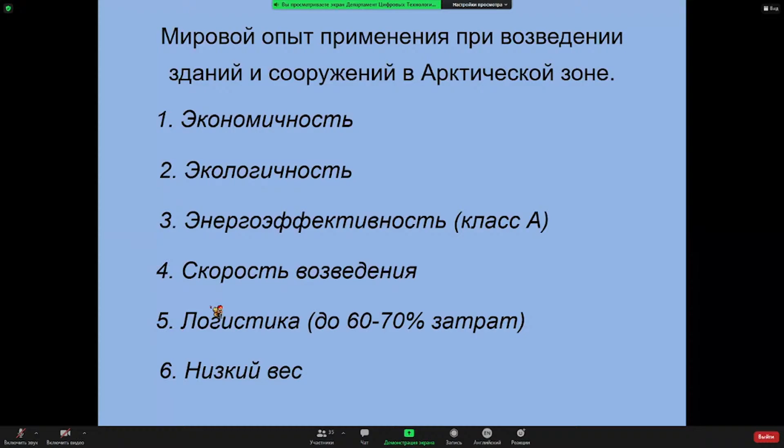Let's have an example: if we're going to build childcare somewhere in the farther regions, the building will need repair for the next 50 years. There will be a lot of losses through the heating system, and energy efficiency will be at a lower level. The main thing is not the construction itself. The construction is only 1% to 7% of the life cycle of the building, and the use of this building is more than 90% of its life cycle.

So if you're going to show the better use of this building, it will not be needed up there in the north without the better experience of using and constructing these buildings.

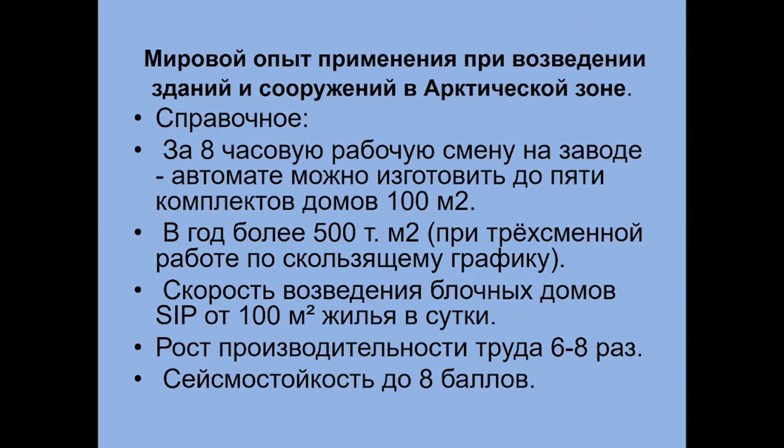So in conclusion, I will say something else. I want to give you some information on the technologies. You can look it up on the screen to see how efficiency can grow in the construction of buildings in the north.

And the technology of the construction of it.

Technology of the construction of the house kits, and of everything else, is the industrial construction and all other technologies that are presented in the Russian Federation to this day, presented by an Italian company.

If we're talking about the necessity, our president talked about it earlier. As I know, in Yakutia, we need a lot more investments for repairment of the houses, and it we can count as crazy money.

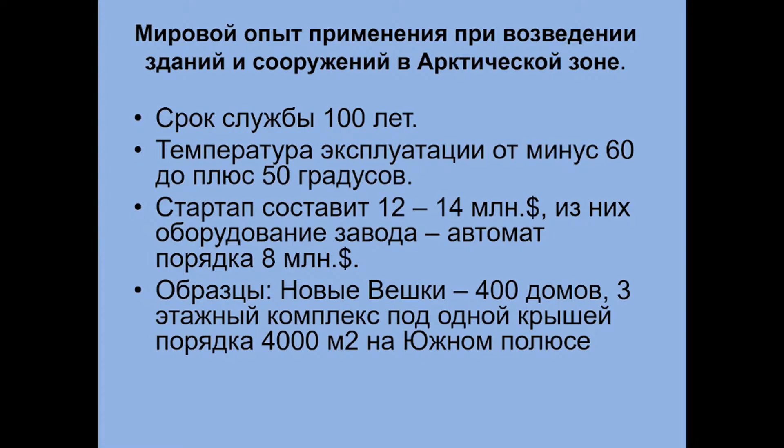The technology of panel construction buildings was invented by the French people, and these are technologies that were invented after World War II, and it was necessary back then. But then our engineers also took that technology and built buildings like that on the whole territory of the Soviet Union.

Yakutsk is quite a large city, one of the largest cities in the North, and it's built on permafrost. We know that Yakutsk has a more or less good situation with buildings, but still we have some problems that we have to somehow face if we live in a warming climate.

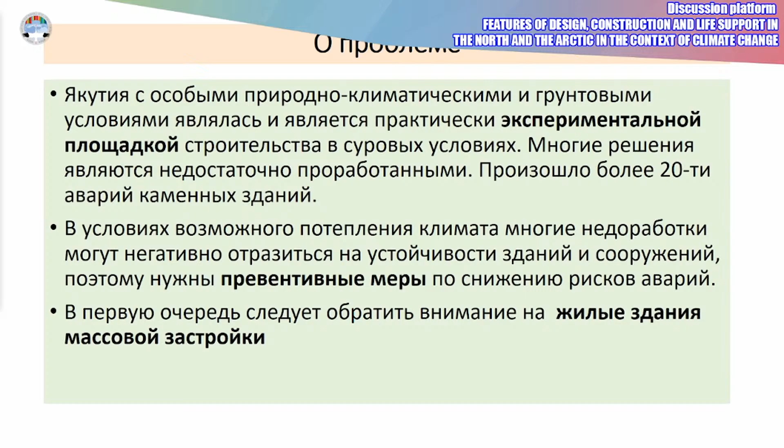So what's the main problem? Since capital construction started in Yakutsk, the city became a kind of testing site. The requirements for frost resistance of concrete foundations only appeared in the 1970s, only 25 years after the start of capital construction, when the terms of reference and regulations were developed. That's why we had some problems with building failures.

Let's look at what kinds of buildings we have in Yakutsk. We have so-called Khrushchev-era houses, large prefabricated panel houses, prefabricated block houses, and other types. Here are the years when these types of buildings were commissioned and how many.

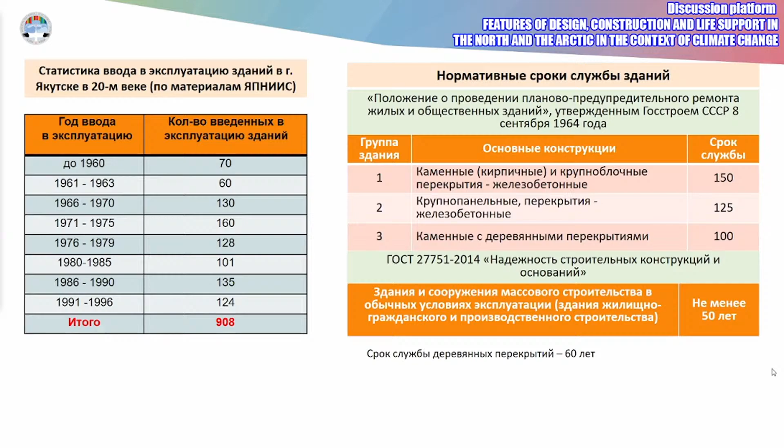In Soviet times, we had very strict requirements for the service life of these buildings. Buildings with wooden floors had to serve for 60 years. Those were among the first houses, and the term has already expired, so we'll have to do something about it.

What other problems do we have? The first houses with wooden floors are not very frost resistant and have very low-ventilated basements. And the brick structure is not very safe.

Another type of building—they wanted to make something good, but in fact it didn't work as they thought. Again, the basement is quite low, infrastructure is leaking, and wear and tear affects this building significantly.

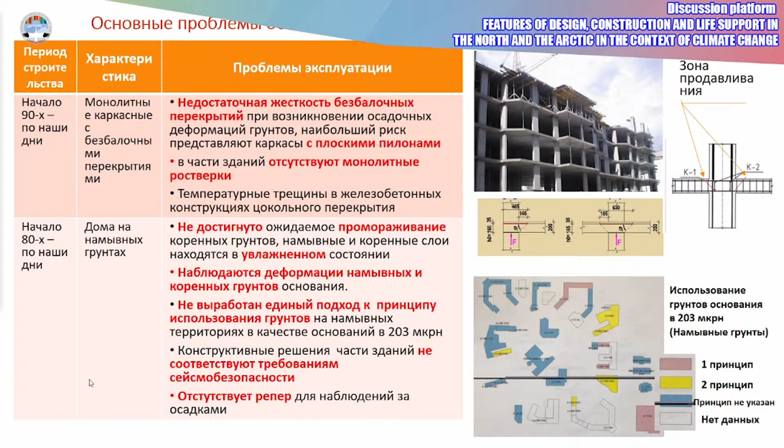Another problem with those artificial sandbanks is that buildings were built on plots where different types of ground were combined, which is not recommended. One of the key problems is the rigidity of buildings and their resistance to subsidence deformation. Here you can see those problem points that we have in different kinds of buildings.

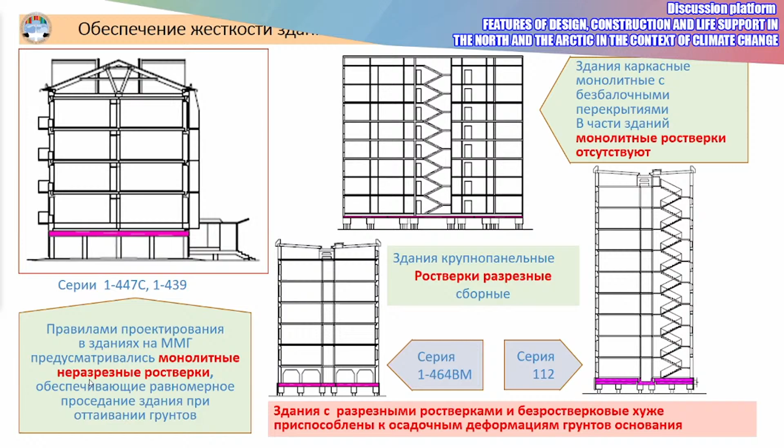The problems include the absence of monolithic grillages. So what do we have to do to ensure the safety of these buildings? Technical documentation, monitoring, calculation, analysis, and everything else that has to be done under conditions of climate change.

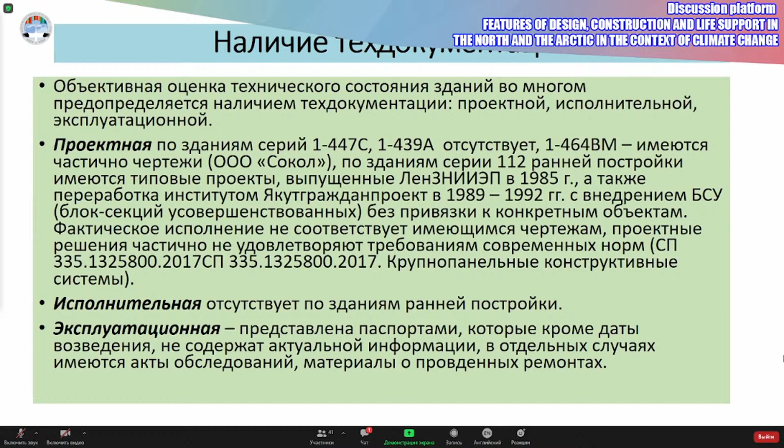For older houses, actually, we don't have any technical documentation. With newer buildings, it's more or less okay, although the factual designs do not always correspond to the typical or recommended terms of reference. That's why we cannot be sure at all times what was used exactly in one building or another.

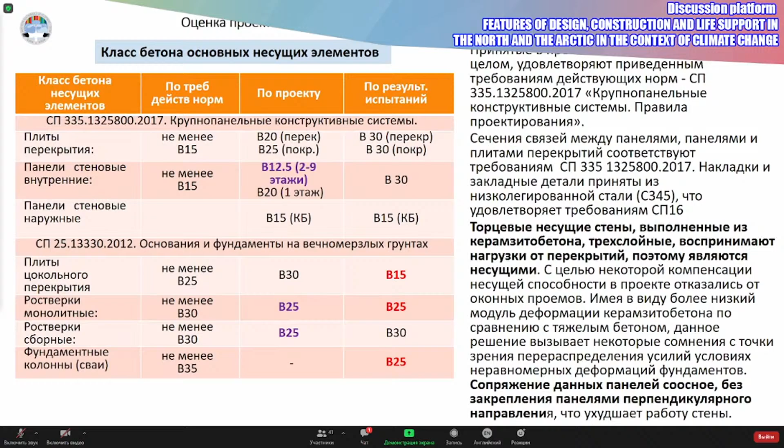Another key problem for northern climates is the class of concrete quality, especially for the bearing structures. Again, here we see that the class of concrete does not comply with the requirements, based on the results of real-life tests that we have done.

Another key aspect that we should look into is the reinforcement of the bearing elements. Again, at some points, the solutions that were used when building the houses did not comply with the requirements.

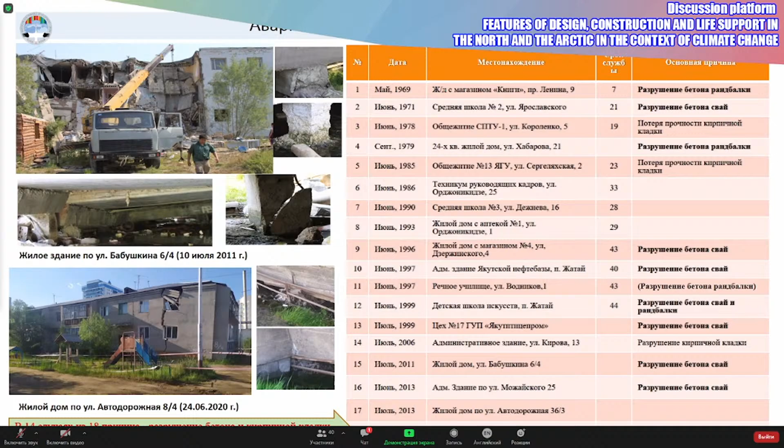We had over 100 different failures, some of them quite serious, and 18 houses suffered major failures. But we didn't record any problems with foundation instability due to permafrost melting—so either it didn't happen, or we didn't record it.

The main reasons for failures were cracking of the piles and foundations, decomposition and wear of concrete, low quality of concrete, and the destruction of brick structures.

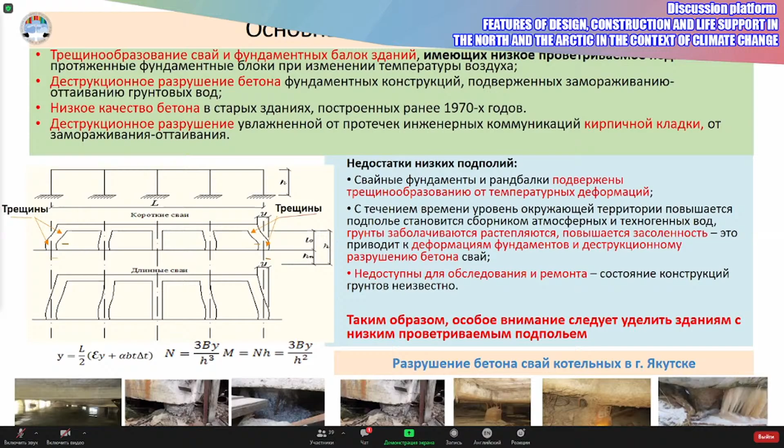Especially, I would like to note that these low ventilated basements, pile basements, cause a lot of problems, especially in the old houses. Recently, we had some more news about failures and cracks in the brick buildings of the older types.

We are using modeling, and we use quite robust software models. Here you can see the results for that building that subsided. Our results showed that the reason was that silty grounds, silty soils were under the building. And you can see how uneven the underlying ground was.

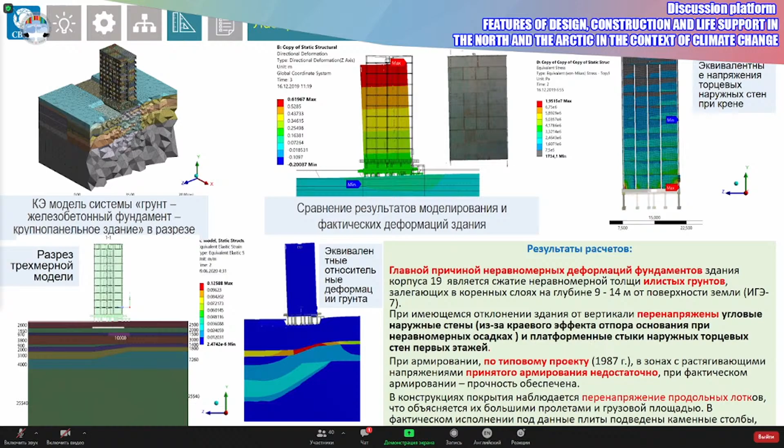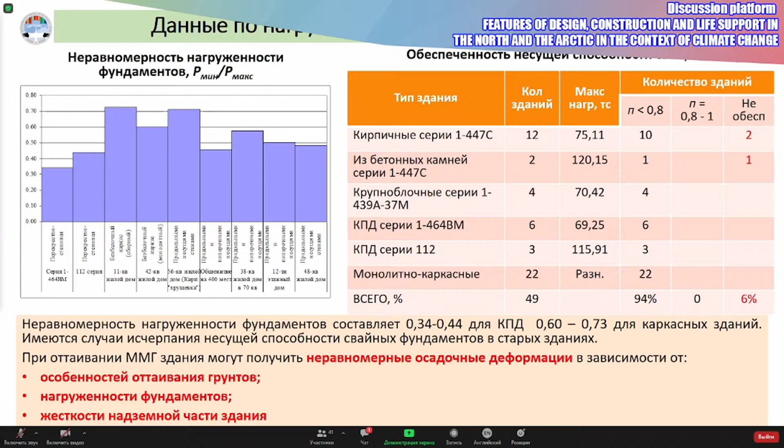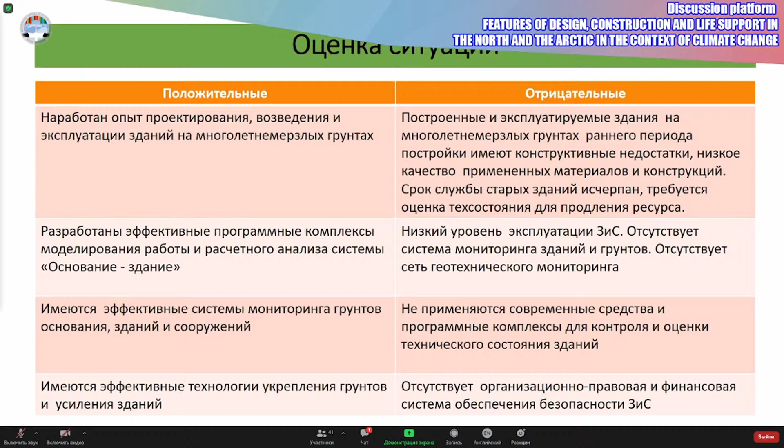We also have some information on uneven load of the pile foundations. Sometimes there are overloaded or underloaded sections.

What is our solution? We have to get ready for climate warming. We have to face the present situation, and it's the life of people. I think it is necessary to establish a computer modeling center, a unified center that would undertake calculations, requirements, monitoring.

We have people, we have software, and we did this calculation modeling work at other facilities because we don't have enough hardware. We have staff, we have human resources who are aware of what has to be done, they know how to do it, but we need state-of-the-art hardware to undertake all of this.

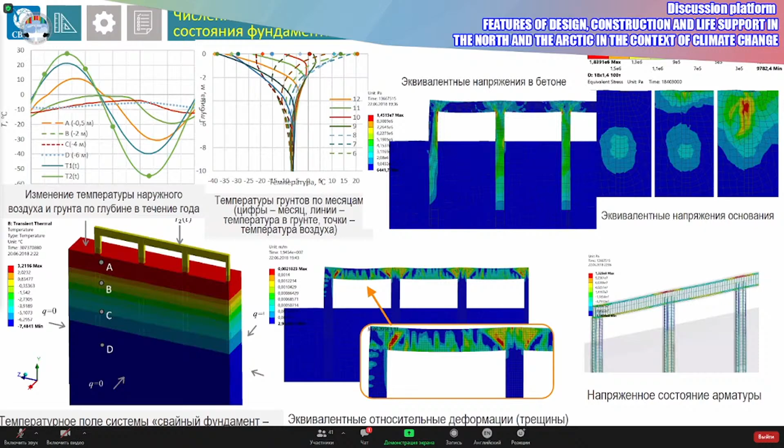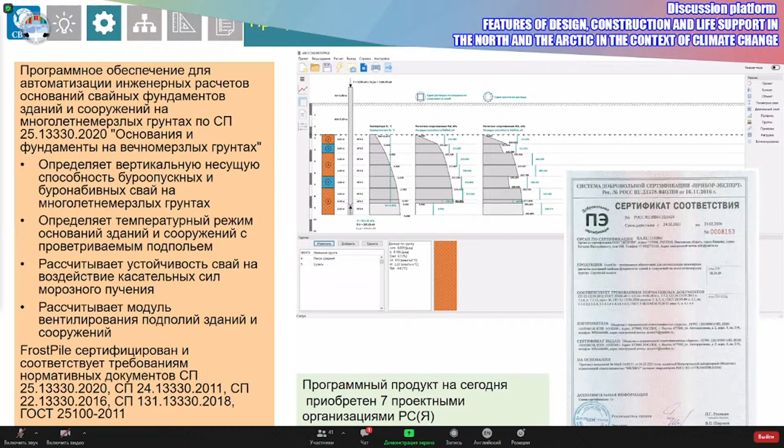Here you can see the numerical modeling of the thermal status of soils. We also developed software for calculating the pile foundation designs.

So what are the recommendations? To develop a Republic-wide program for ensuring safety of residential housing, to reduce the risks of failures due to permafrost degradation. We should establish outstanding geotechnical monitoring of buildings, especially on the artificial sandbanks.

Number 3, inspect all the buildings with low ventilated basements, especially old buildings, and we have to retrofit them to comply with modern safety requirements. And of course we have to replace them step by step.

We have to develop special rules for building on artificial banks. And as I mentioned, the Center for Computer Modeling would be a very good idea. Thank you. Do we have any questions for Fyodor?

Today, I want to remind you that I have a co-author, Chunyuk Dmitry. He is the head of the department at the National Research Moscow State Construction University. And I want to highlight...

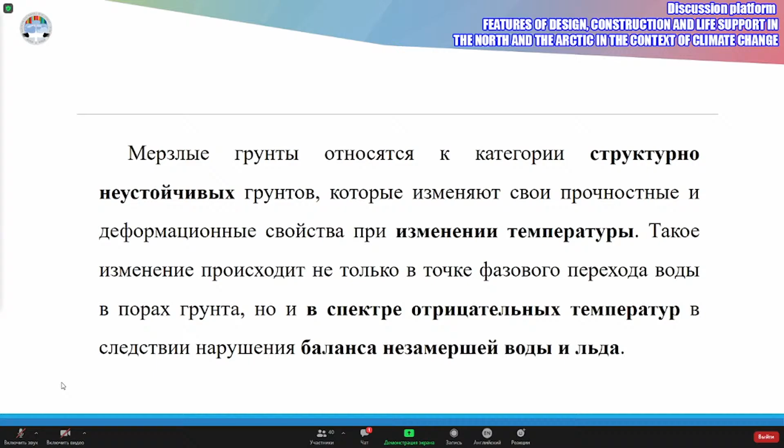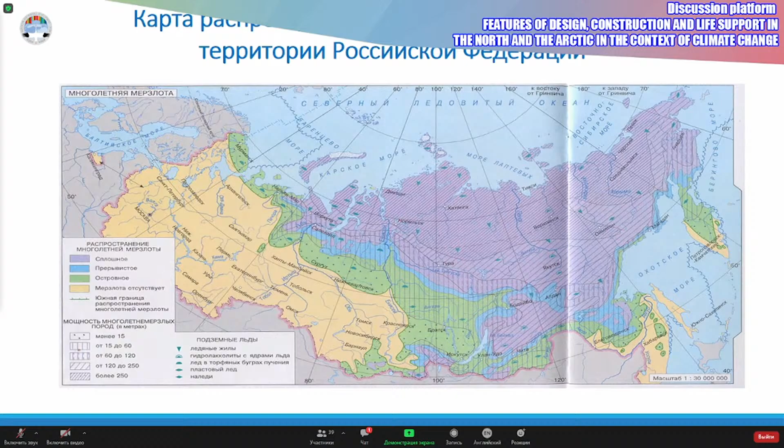So we needed to construct the buildings so we can be sure in it tomorrow. The most intensive warming season is spring.

Here we need new technologies. The most elementary thing - that's the story of permafrost research, thinking about it, and the experience of construction and capital construction.

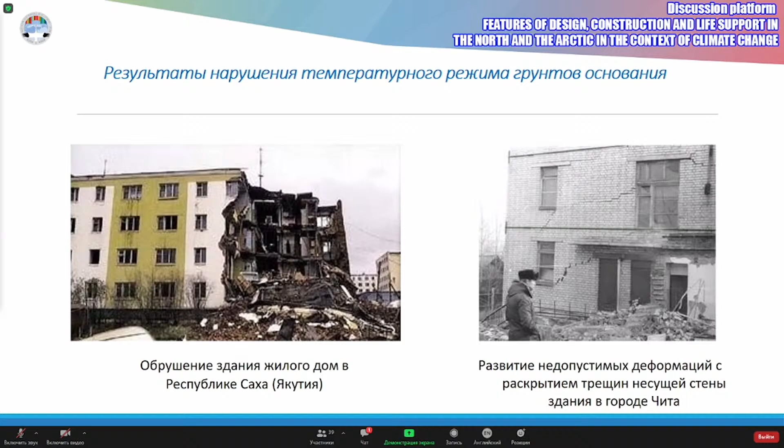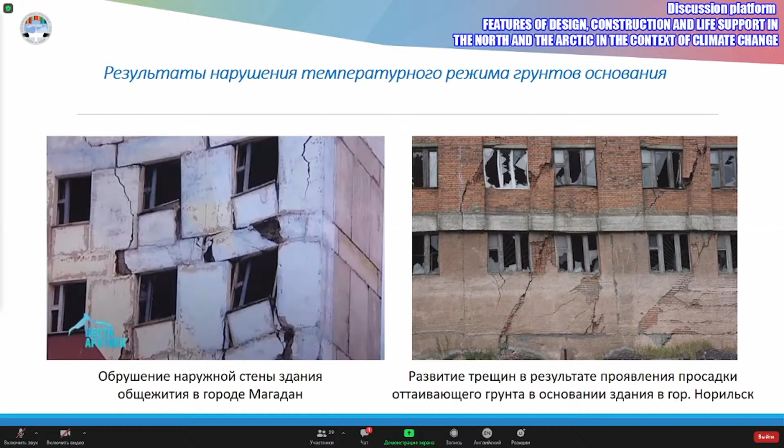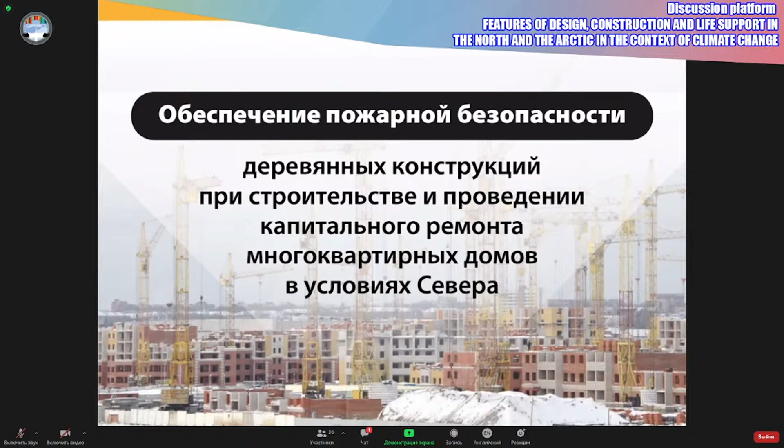That is why if we look into the special requirements for fire safety in the far north, first of all, there are state standards. This one is our bible for fireproofing timber, and there is an item in this standard which says about the lifetime of fireproofing: if it's intended for over 1 year, we have to make tests for the wear, and if there are no such tests done, it means your fire retardant is only good for 1 year, and every year you will have to reapply it.

But if your lifetime is like 7 to 10 years, whatever, the standard says that you have to prove this using fast tests, climatic tests. So a fire retardant, for example, should have 2 protocols from an accredited certified laboratory. First one is the speed test, climatic fast test, and the other one, the proof of fire safety properties after the fast test.

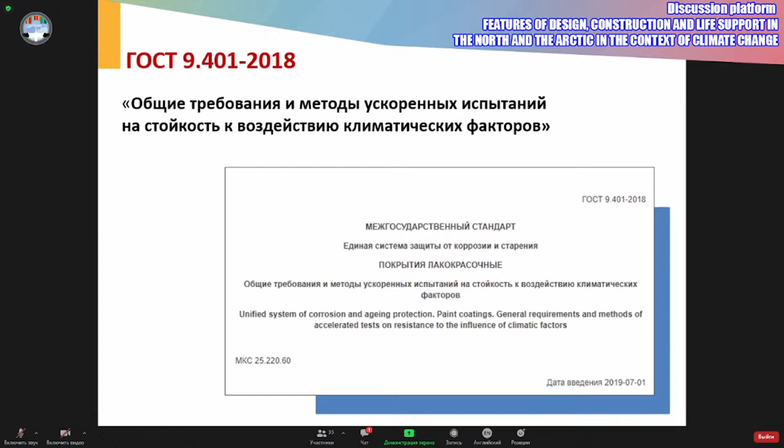So this was my first point, and the second one has to do more with capital repair, and it is very relevant for our country. When we repair a roof, it is recommended to do it at temperatures below 0. Why? Because at above-0 temperatures it may rain, and when we disassemble the roof, you will just flood your upper stories. The materials used should be ones that can be operated and installed or applied, including at below-zero temperatures.

And us, as one of the leaders of producing fireproofing substances, we have some solutions for cold climates as well. Our Pirilax series has components similar to the components of timber, and it crystallizes at -16. So above -15 you can just apply it without any preparation. You can use it in attics even without a roof, which is really helpful.

So what does it give you? It retards fire, it makes the timber fireproof, it's also an antiseptic substance, and it also prevents cracking, conserves the surface, and stops wear and tear. So if you apply this kind of substance, you prolong the service life of your timber structure.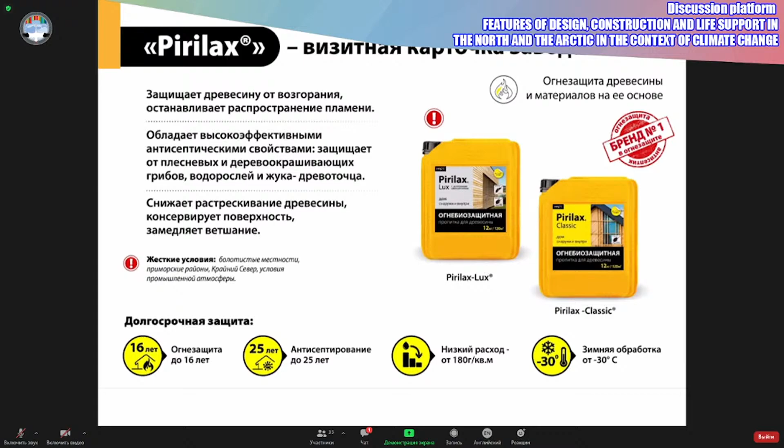As I mentioned, we have to provide certain certifications through specific climatic tests. For these substances, we have such certifications. For the far north, in the open air, we have a certificate for 5 years. And in condition number 3, unheated premises like attics, we have a certification of up to 5 years of service life in the far north. On the slide it says up to 16 years, but that's in more moderate climates. These are the first pages of those protocols, and when you fireproof your structures, you have to make sure you have these protocols, whichever substance you use.

So how do modern substances act? On the right, you can see a regular fire retardant. Since ancient times, retardants were mineral water solutions - water evaporates and minerals stay in the timber, which stops fire. But they have a certain drawback: salt. Salt is absorbing water, and salt will be efflorescing on the surface, and also it's water soluble.

So for those regions where we have challenging, harsh continental climates and short summers, where there are a lot of rains, we recommend substances consisting of timber-friendly components, where the components interact with celluloses and lignin, modify them, and transform the timber to fireproof it.

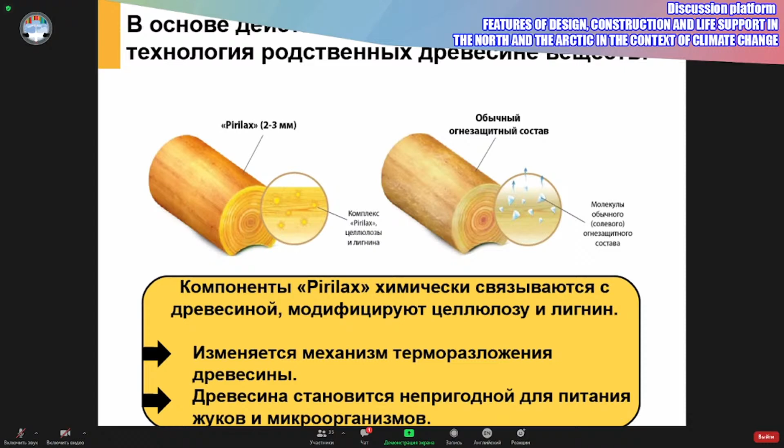On this slide, these are examples of regular standard mineral salt fire retardants used. You can see these white spots that start forming on the surface in the autumn. Again, you have troubles with painting when you have this surface formation.

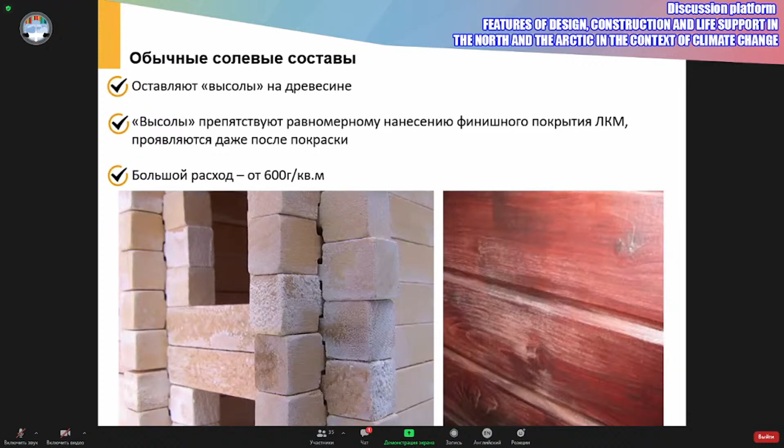This is how our fire retardants work - not only ours but any fire retardants. These are roof structures of a cafe. There was a fire from the electric network, and they have soft roofing, although it's a violation of rules. Despite the fire, after 60 minutes the fire was put out and they disassembled the roof, and you can see the structures have just charred a bit. After cleaning and recoating them with fire retardant, you can continue using them.

There are also more economic substances called hybrid fire retardants. They are a little bit less effective, but they're also used, especially in places where you don't need any special decoration - for example, attics. Hybrid means it has both mineral components that can also help, but their percentage is less, plus these special timber-friendly components.

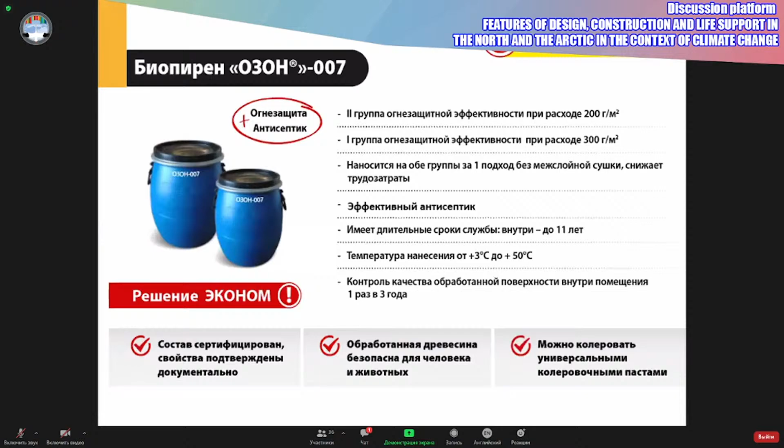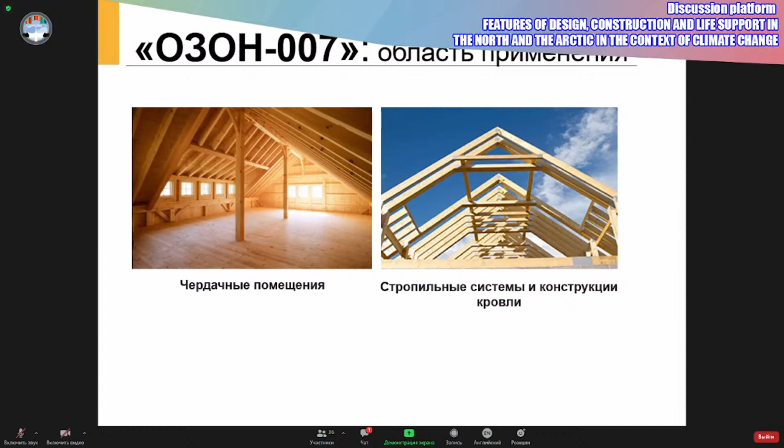In our series of products, we have Biopiren OZON-007, and this life service certificate for northern conditions should be there, and we have them. As I mentioned, hybrid solutions can be used inside the attic, and this is the comparison of our products without mineral components and with mineral components - hybrid components.

Both of these substances have certifications. Can you please go on to the summary? But it's just an example - I just want to explain that hybrid substances can't be used at below 0 temperatures.

Thank you for your attention. If you have any questions, I'll be happy to answer them.

Yes, it's a very important aspect. Annually, we lose a lot of wooden houses and we lose lives, which is a tragedy. Please, you could have indicated your website where we could find all the information. NPO Nort - you just Google it and you can find it. Okay, thank you.

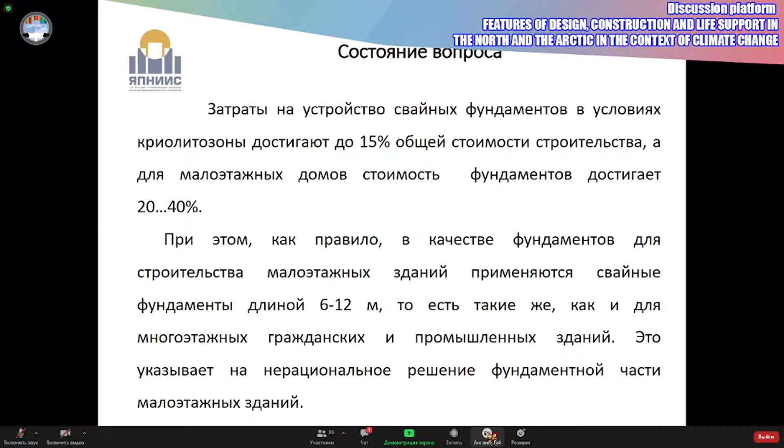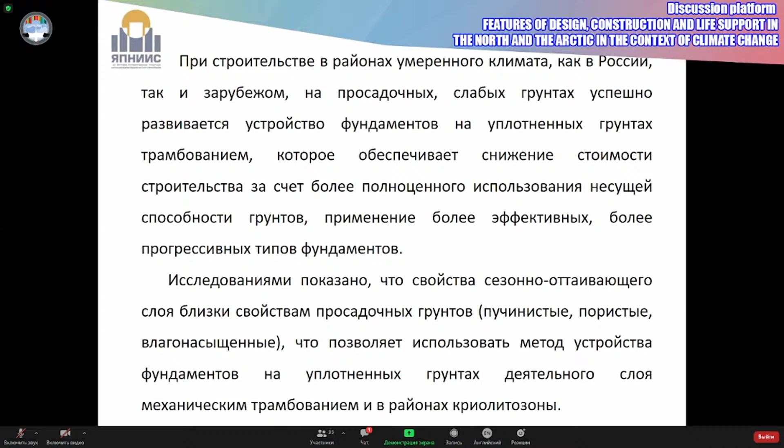So our institute, since 1998, paid attention to the possibility of using this slab foundation. We tested lower foundations in regular temperature, and last year we did some tests with the mechanical ramming.

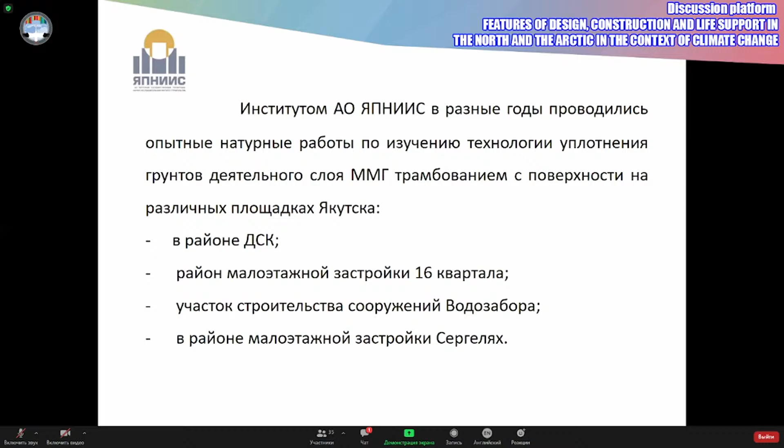And the foundation can be taken on a status, and the main parameters are the definition of the weight of ramming and the height and how deep it goes.

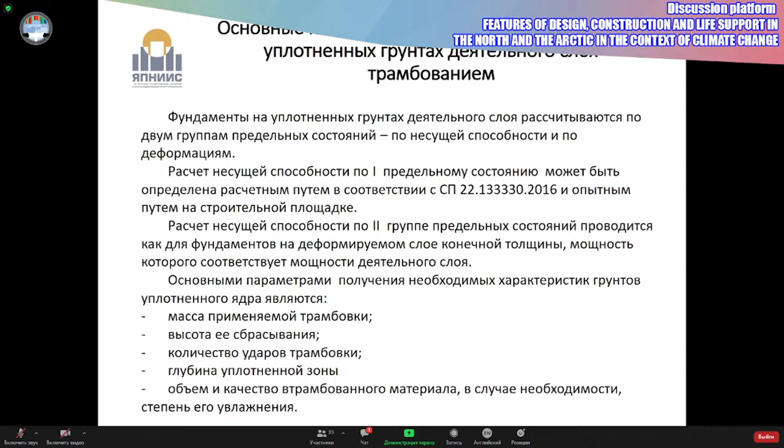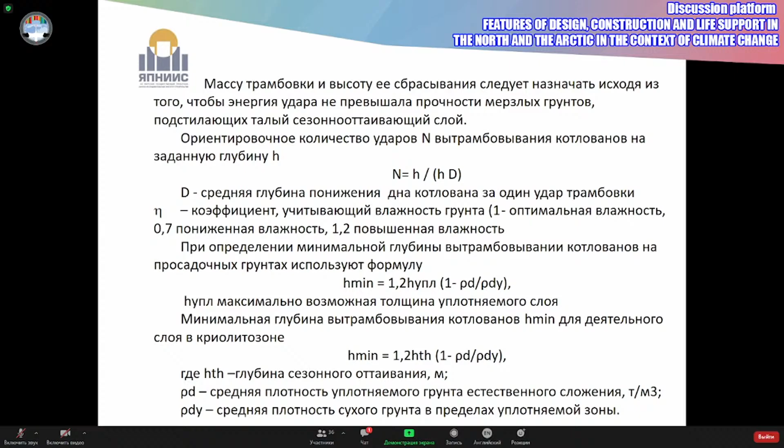The mass of ramming goes into this formula that is shown on this slide, and how deep it shows. But not only that, we're taking the width of this layer, and with this we analyzed ramming.

In 1999-2000 so we can see how big it is and how deep it goes without touching the permafrost.

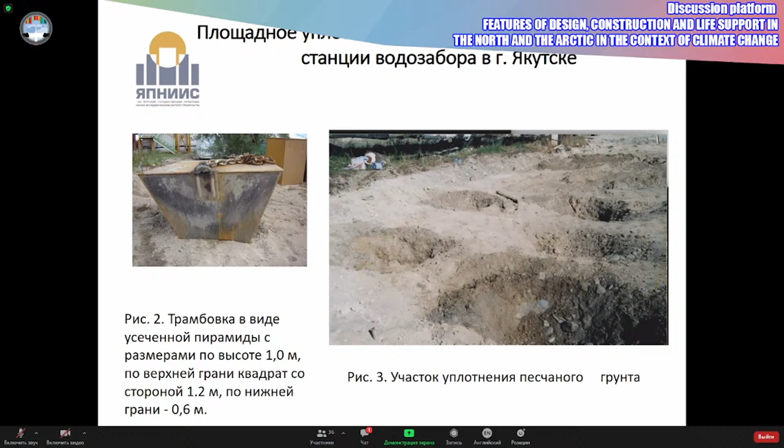And ramming of this water cleaning station in Yakutsk, and we worked on it besides the water intake, and we used it later, and we made it. And right now on this platform, you can see that the station was built.

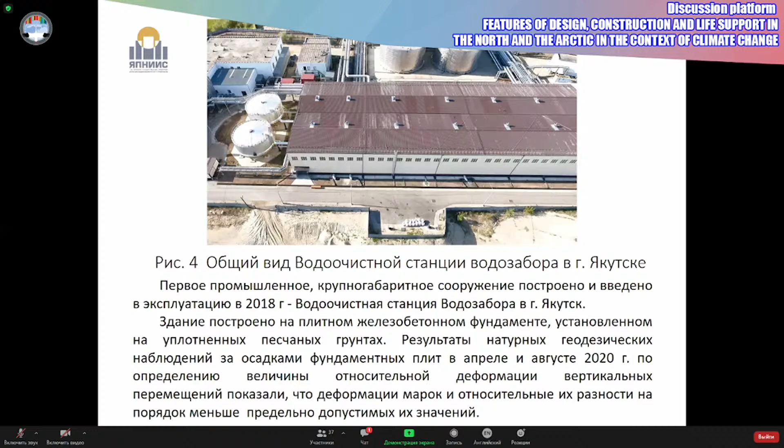They started using it in 2018 on a slab surface foundation with the sand foundation tool. And with the testing of geodesical monitoring in April and August of 2020, it showed that the size of it is less than the normal size.

And the foundation work was also tested, and I got the results that since 2001 the thickness goes down. So the foundation was under the pressure, and all of this 15 years...

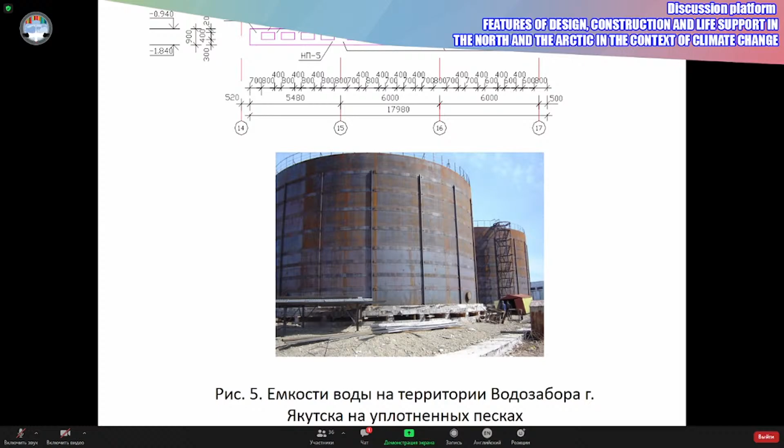We had the steel concrete materials. It was around 1 meter, so the pressure was pretty good. And in 2001, on this kind of foundation for the water intake, for the reservoirs...

We made the foundation thicker. And right now, this building is under our monitoring. Till now, this building does not have any lacks, no defects, no deformations.

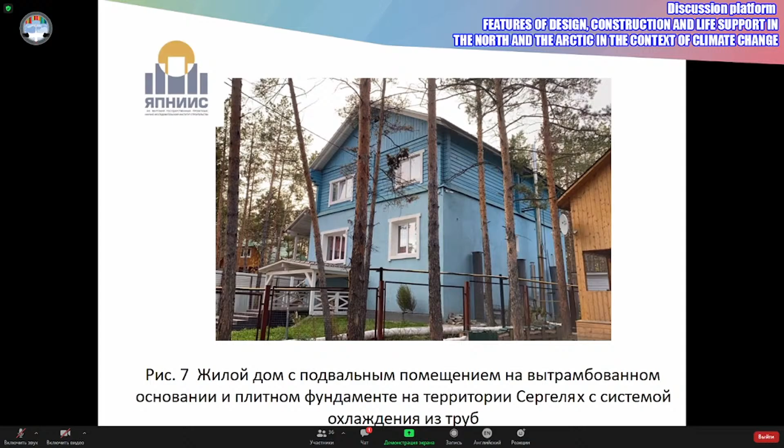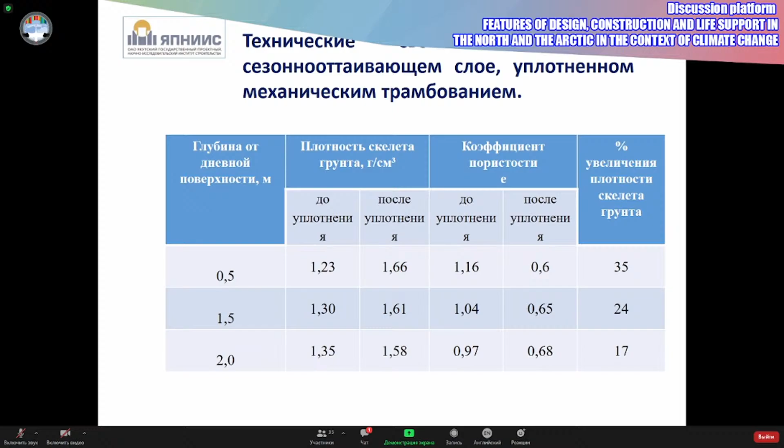It has the system of cold pipes, and the building was built on the first principle. The technical characteristics of soils in melting seasons goes with the percentages of 24 and 17, and the results of natural experiments...

Showed that the mechanical thickening goes with the layers, and the possibility of using the used layer for the main foundation created this big slab surface, and you can use your own foundation if you need to.

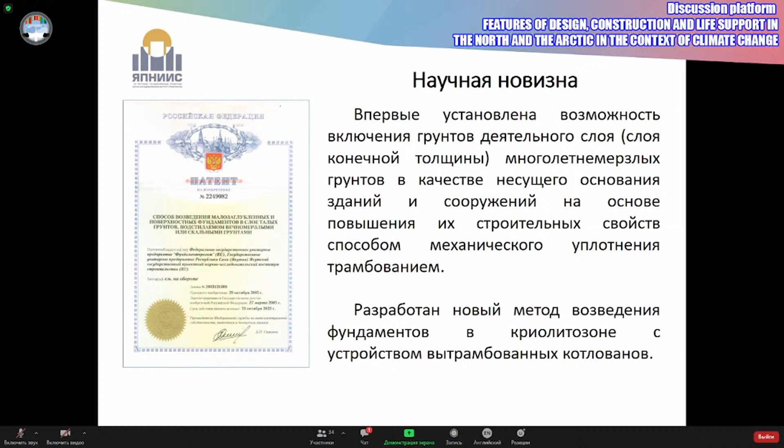And why we did it, with scientific reward, we patented it. It's a new method of the fundament in permafrost that was developed, and with the prices in 2005, the prices were dropped for the constructors.

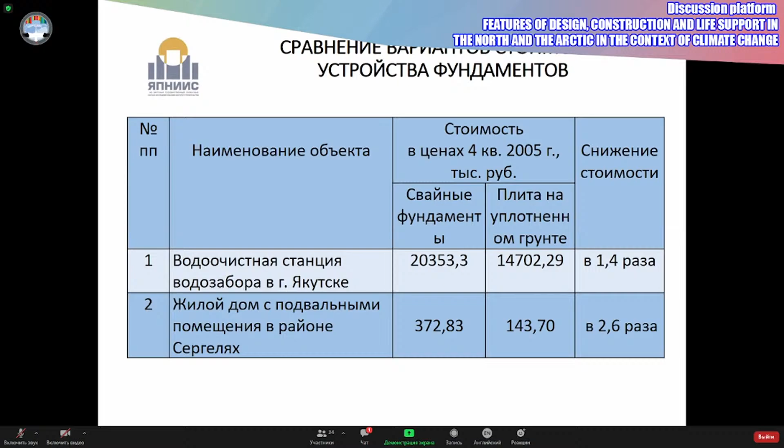So with the Yakutsk State Design and Research Institute of Construction, we, as a result of the work in 1999, worked on the thickening of the foundation and the foundations.

And in conclusion, I want to say that it was shown that the thick foundations are on the first principle, and secondly, the technology of thickening the foundation was done, and thirdly, we showed the economical logic to use it.

So I want to say that this kind of foundation decreases the price. It's economically smart. It's ecologically good because we're not destroying anything, and it helps with the underwater. The range of using it is wide, and thank you for your attention.

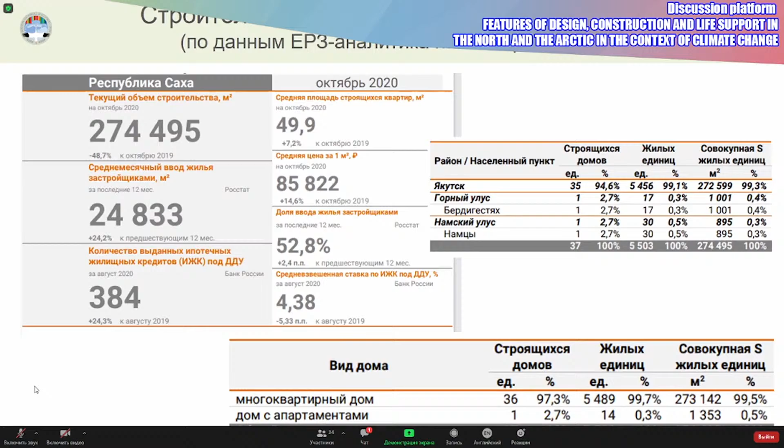And we've mentioned the construction of multi-storied buildings, and in October of this year, the total area of these multi-storied buildings was over 275,000 square meters, and the majority of them are being built in Yakutsk.

Of course, these are apartment blocks. These are the number of stories. Right now, we are building from 13 to 17 stories.

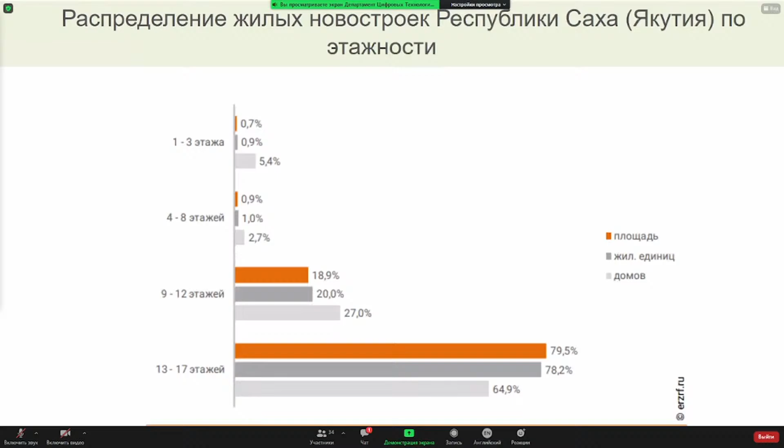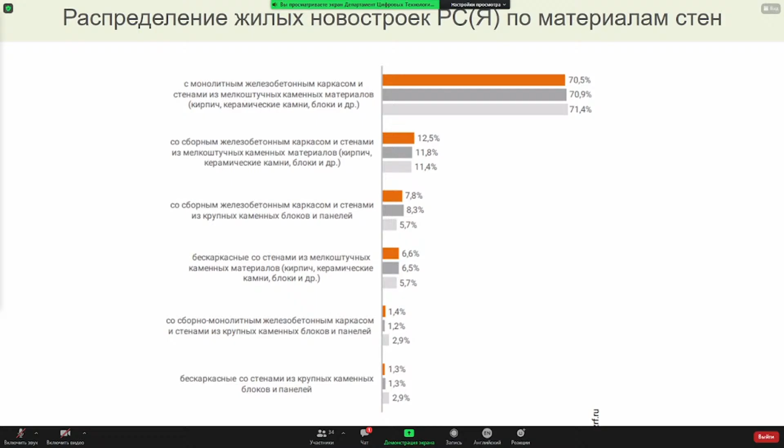In order to build a 16-story building, we use so-called frame monolithic technology. 70% of the buildings are constructed using this technology.

And of course, we are using ventilated facades or so-called wet facade. But recently we've been using ventilated facades because wet facades didn't prove to be good for Yakutsk. And you all know that we have requirements in Yakutia.

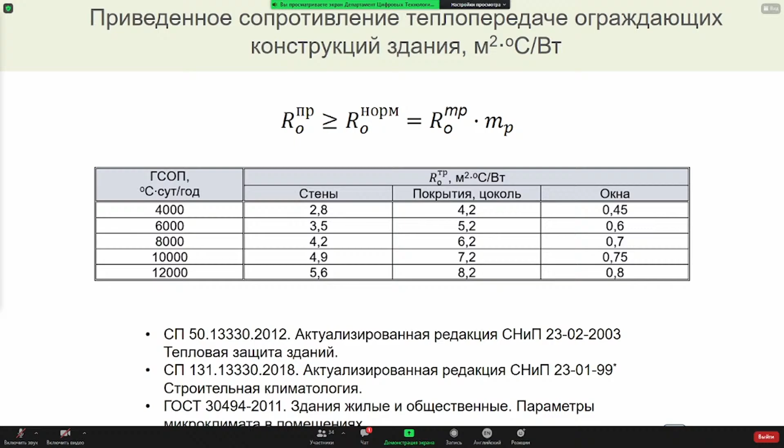We have quite a long heating season, and we have high requirements for insulation and walling. So what are our main problems? We monitor different buildings, we inspect them, and in the modern apartment blocks, we have a lot of problems on the first 2 floors, especially the basement floor.

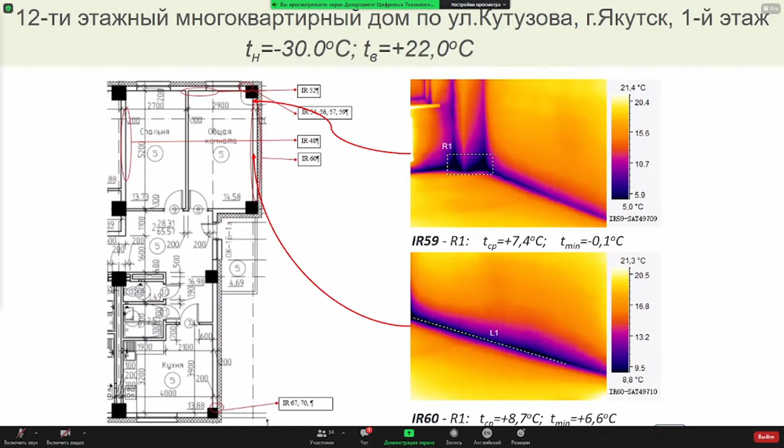The links are the weakest points, columns, basement floor contacts. We have 12-storied, 16-storied buildings, and we see weak points where columns are mostly.

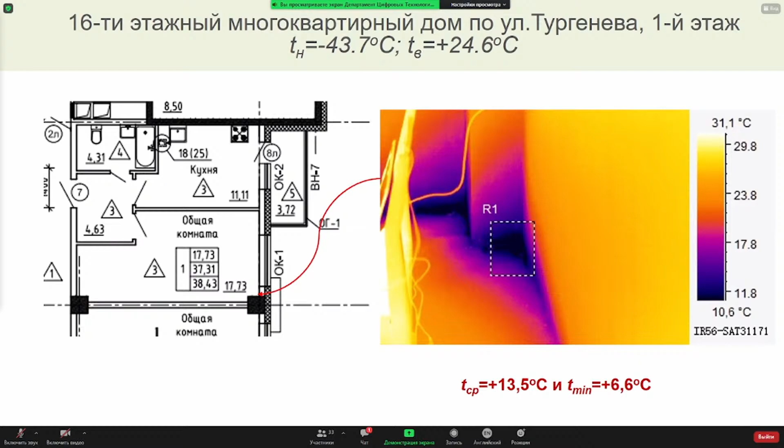And there is this one building that we inspected. These are outer columns where the inner temperature, you can see, is very hot, almost 25, while it's minus 43.7 outside, but still the temperature at contact is only 6.6 degrees. And we did some calculations because there is a lot of software for temperature calculations.

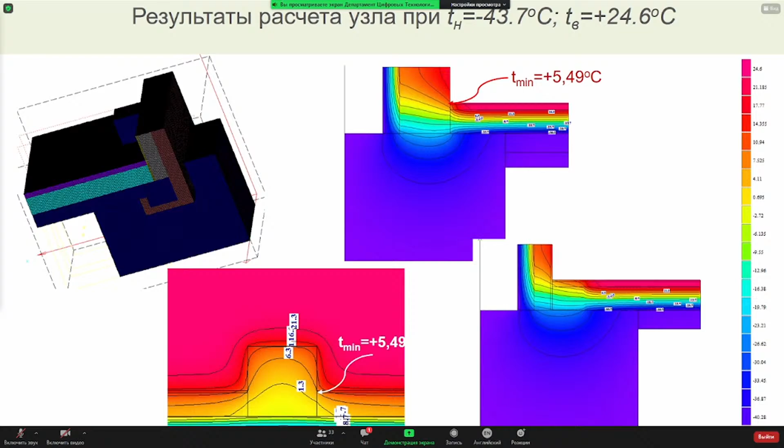We're using Heat3D, Swedish software, where we take into account not only the walling but also the outer grillage. For example, the grillage for 4 columns - even according to calculations, the temperature in the corner makes 5.49 at minimum. So even at the designing stage, we allow it to be lower than required.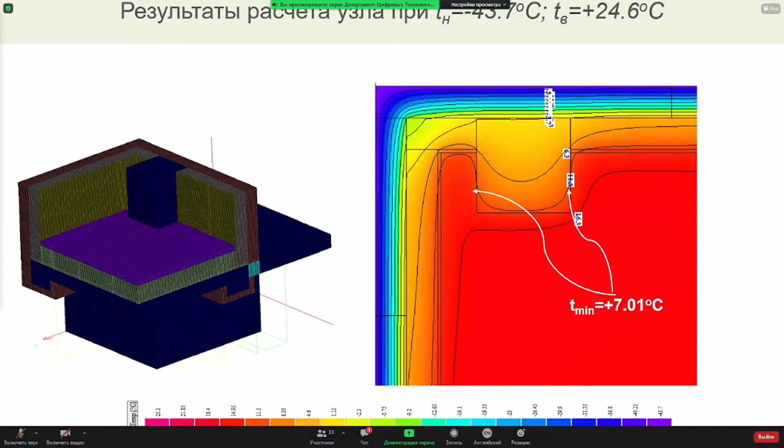And the so-called outer corner is the most problematic point. Sometimes it's almost 0. Again, we calculated, and the heat loss occurs through columns and massive grillage. We have cold bridges there, so the temperature is only 7 degrees, and you can see the distribution very clearly.

Again, the basement floor, the flooring - that comes first, and we see that in balconies we use perforation, but sometimes it's only done along the longer side of it, and as a result we see lower temperatures in these corners. The temperature there was minus 7 degrees.

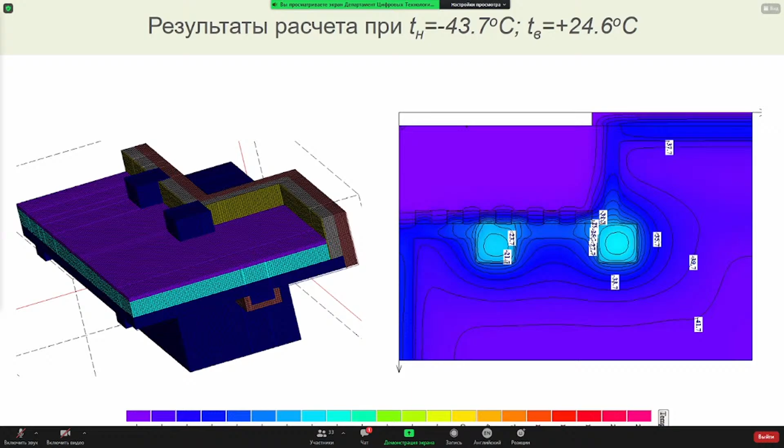And again, the calculation - this is ideal conditions with insulation very close to where it should be, and it's still 6 degrees. You see perforation along the longer side, but along the short side you see a lot of impact from cold bridges.

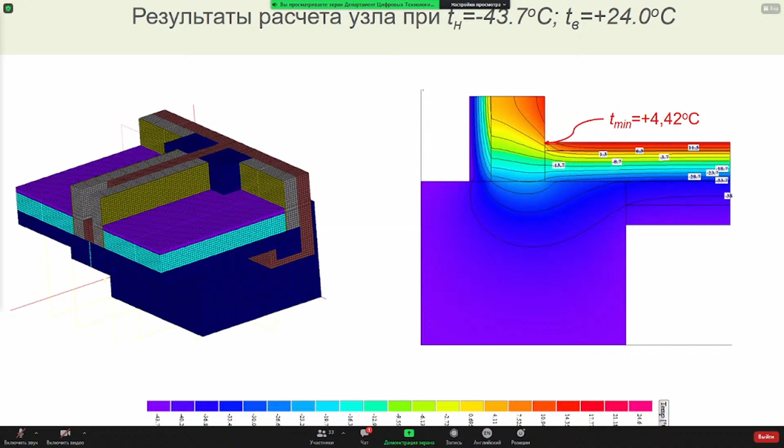And the temperature seam, so-called double inner wall. Recently, they also installed insulation 2 meters from the outer wall. But still we have a temperature of 4.4 degrees in the corner, which is still below the dew point.

And there is a standard solution. We used smaller concrete stones, and you can see their width and thickness. But you know that polystyrol is not always attached very closely to the walling because walls are not even. That's why they use Isover.

And we use regular polystyrol foam slabs. And the temperature here, again, in ideal conditions, is only 9 degrees, which means that we already design the corners to have temperature below the dew point.

And this is the part of the inner wall. So why do we have these problems? First of all, these are 3D cold bridges - grillages, columns, floor slabs, and small scale building blocks.

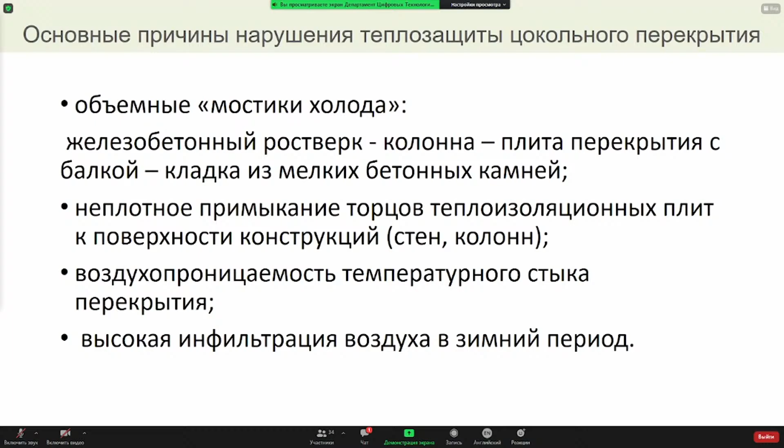And the last and very interesting reason is that high infiltration of air in winter, because different pressure creates higher infiltration. So these are the differences between inner and outer pressure of air. At -10 it's shown in red, and at -52 it's shown in blue, for a 16-story building.

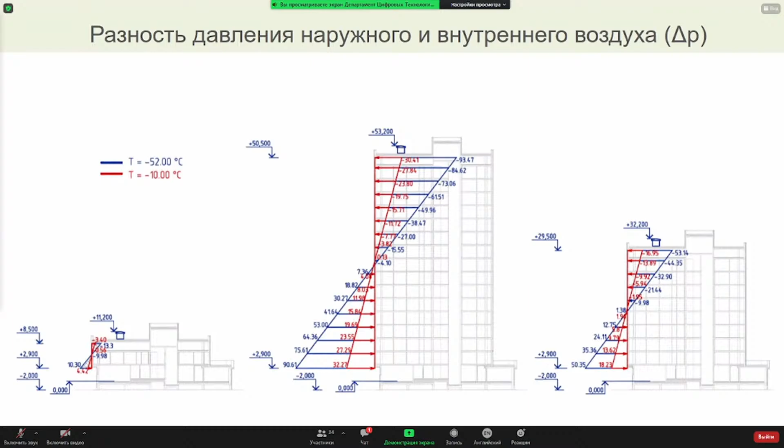You see that we have double infiltration for a 16-storied house compared to a 9-storied building. That's a huge difference. And this pressure can be compared to, for example, in the region of Moscow, it would have been a 100-storied building. That would give you the same pressure difference.

So what are the solutions? Why not isolate outer walling from inner structures? For example, let's use a heat-efficient beam. The temperature here rises and it is immediately higher than the dew point. It's 14 degrees.

Another interesting thing is the distance from the inner corner to the line with 0 temperature. In typical solutions, it's only 80 millimeters. It's just right under your floor, under the levelling layer of the floor, as soon as there are errors at the construction stage, you have 0 temperature in your floor.

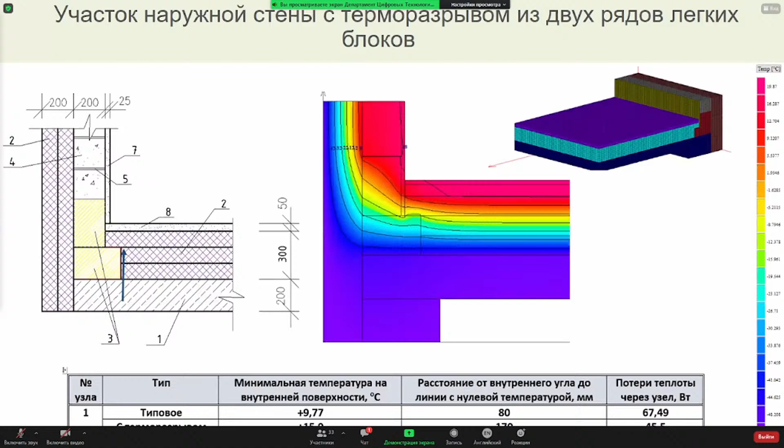Another solution is the part of outer walling with a thermal break made of some light blocks, for example polystyrol concrete. Here these blocks are forming kind of a ladder to improve the insulation. Here it's the same, but two thermal blocks are used.

And the most vulnerable point, the corner. In typical designs, we have this cold bridge at -52. The minimal temperature there will be below 0. But still, we allow this, we put it in our designs. Of course, there will be water condensating there.

Okay, we do a thermal break there using light blocks. Still, the temperature won't be much higher because there are grillages which are very powerful cold bridges.

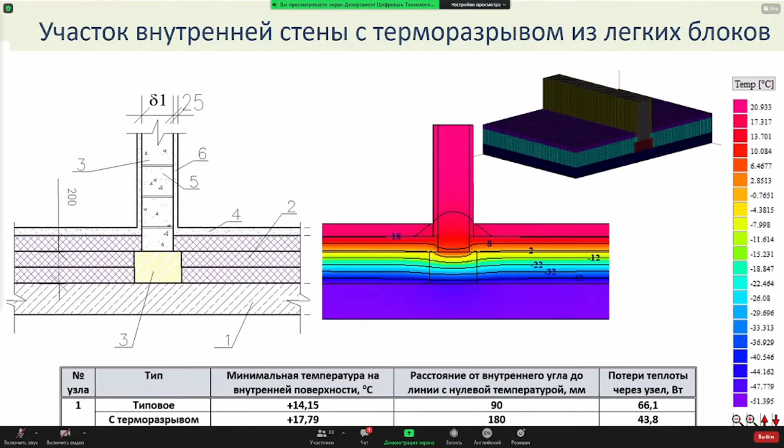Again, here's part of the inner wall. If we install a thermal break block under this wall, it brings your temperature up. With the regular solution, you get 14 degrees, but if you use this thermal break, your zero temperature line goes much deeper.

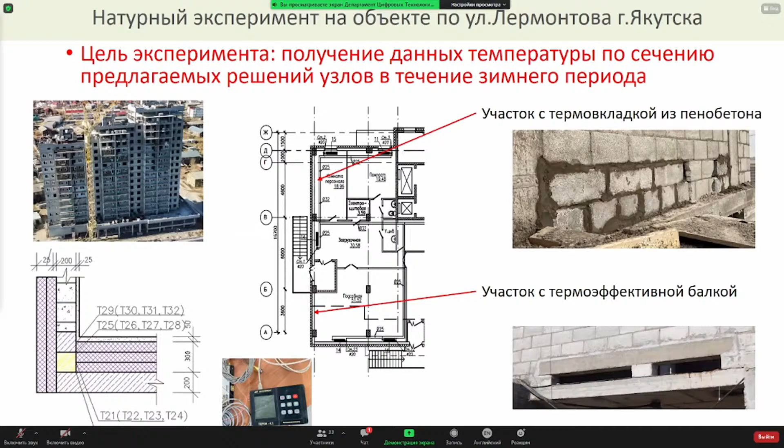These two solutions were offered to developers. Some of them are actually using it now. We are holding temperature experiments. In winter, we are going to test the results in a real house. We're installing special equipment there, and we'll check the temperature in many places in real time.

This is how our solutions look in real life. The developer called Sette is using it at several houses. Grillages.

Some people suggest using outer insulation. Let's insulate our grillage from outside. Although inside the insulation of the basement flooring is quite thick, it won't bring you any effect. It will raise your temperature maybe at 0.1 degrees.

One of the companies building houses in Zhatai, they made 300 millimeters insulation outside, and they didn't have any effect.

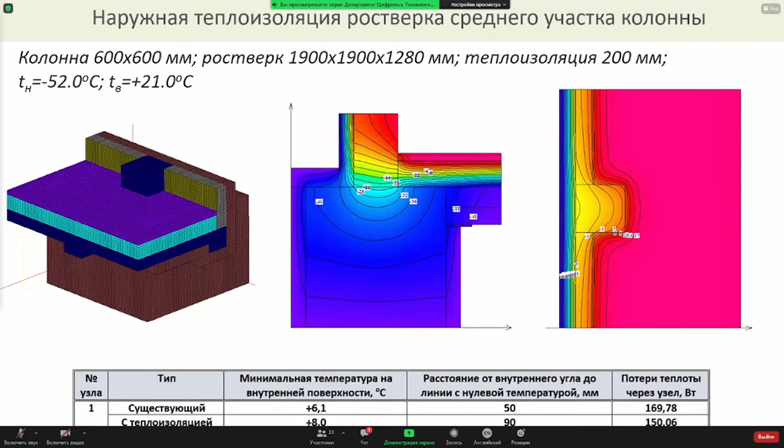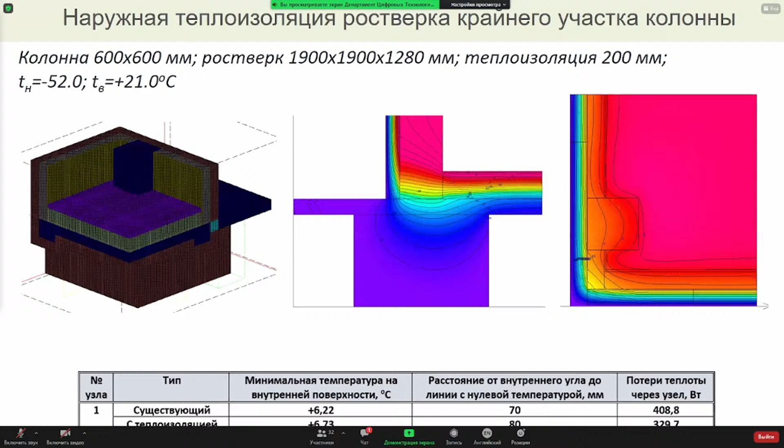And this is the grillage of the outer edge of the column. This is really complicated. It's the most important part of a frame monolithic building. You know that we are building right now a huge facility,

the Arctic Center. They used double insulation of the slab, the basement floor slab. They insulated it twice, but maybe that is too expensive to be used widely.

Our solution is to use a thermal insertion between the grillage and the floor slab. Of course, in this case, we get higher temperature.

Here we have some standard inner insulation of the basement flooring, and with only this thermal insertion, we already have 9.9 degrees. And the distance from the inner corner doesn't change much, from 90 to 107 - that's the distance from the inner corner to the line with zero temperature.

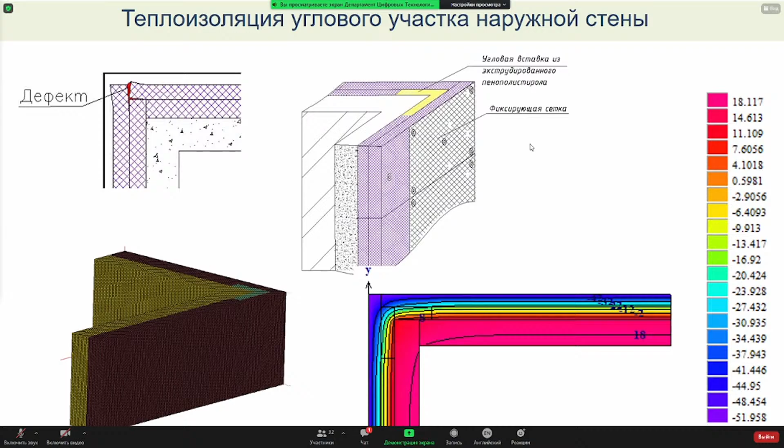Question from Olga Matveyeva: What about the thermal break? How rigid are those units?

I offered it as a beamless solution. Also, we could use vertical reinforcement along the perimeter, some kind of a belt in the grillage.

Another question: What insulation do you recommend for the basement flooring? Probably extruded polystyrol and then mineral plate. So two layers, yes.

Is it fire safe? And the thickness of those mineral plates can be less. Yes, it will be more expensive, of course, but if you want to do something good, you have to pay.